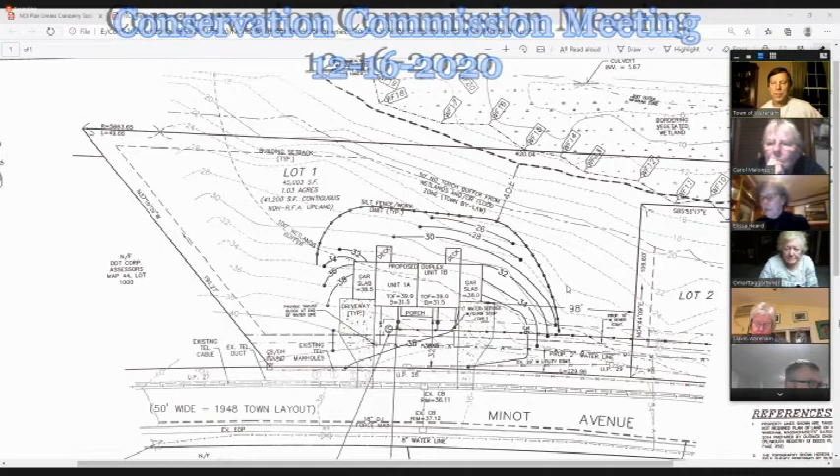It's not good. The engineer is on the meeting. That's good. Do you want to do both of them together, or you want to keep them separate, David? Separate, please. Okay. So this is the 80 to 82, correct? Yes. Okay. Chris, I gather you're here for this hearing? Oh, it's actually Jim. That's right. Yes, Jim. I'm with Outback Engineering. So Jim, what's your last name? Pavlik.

Thank you. So Mr. Pichette will read to the hearing. Sorry. I need my cup of tea. Thank you. Maybe they had shrimp on the barbie for Outback.

Okay, this project site is at 80 to 82 Minot Ave, and this project involves the construction of a duplex in the buffer zone to bordering vegetated wetland. A 28 by 82 foot duplex building which includes garages on either side of the duplex is proposed, and this would be approximately 75 feet from the edge of the wetland. This is a project that was permitted previously, but the order of conditions ran out, and the applicant is now reapplying to get a valid order of conditions in place for the project. The structures are proposed to tie into town sewer and water. The site slopes from the road to the back of the lot.

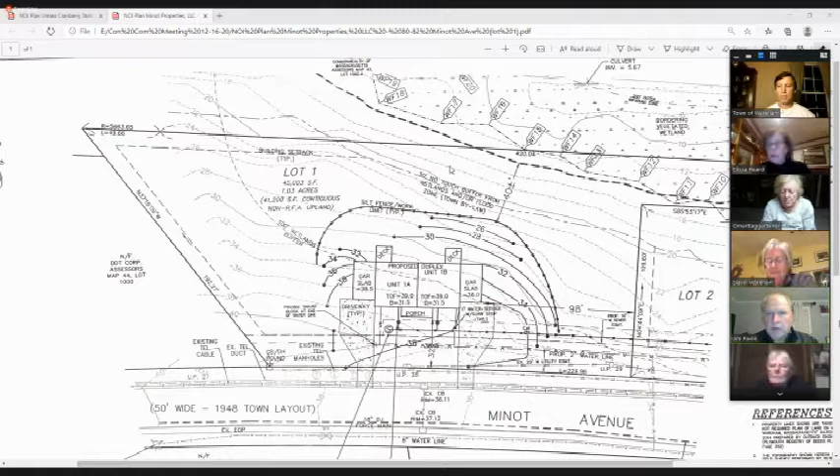I can address that. If that's something the commission would love to see, we could place some boulders along the back limit of work line. Right. I think it's important because it so often expands over time. You have kids, you've got a good plaything, and if it's that close to the wetland, then I think we have to be really careful. It's already too close in a lot of ways. Well, there's certainly plenty of boulders there, so I'm sure they wouldn't mind placing them in that location. Okay, great. No more questions now.

Thank you. Carol? No questions. Ron? Yeah, when was this project originally approved, Dave? It was originally approved a little over 3 years ago. So that would have been back in 2016, I believe. And what was the reason for the lapse in time? I'll have to have the engineer answer that. I'm not quite sure why they didn't proceed. So maybe you've got some information on that.

Yeah. Owner changed. So, full disclosure. Initially I was only the engineer on the project, and I later partnered up with a builder, and we purchased the lots. Unfortunately, I was getting divorced. So we had started the work and then had to put things on hold. And my divorce was just finalized within the last couple of months. Oof, that was a long one. It was over 2 years, almost 3.

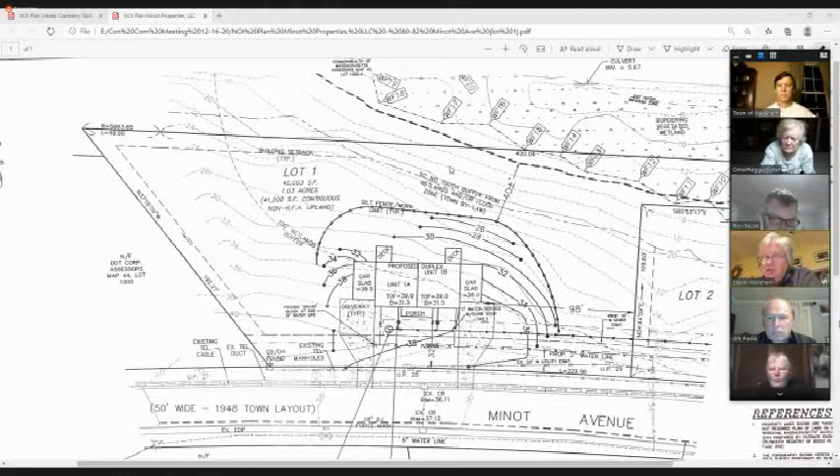Kwame, any questions? I'm just trying to get my bearings correct. I've seen the site, the clearing. Where are the train tracks? They're on the other side of this property. They run parallel to Minot Ave until you see them crossing Minot Ave up there. Oh, okay. Are they on this map?

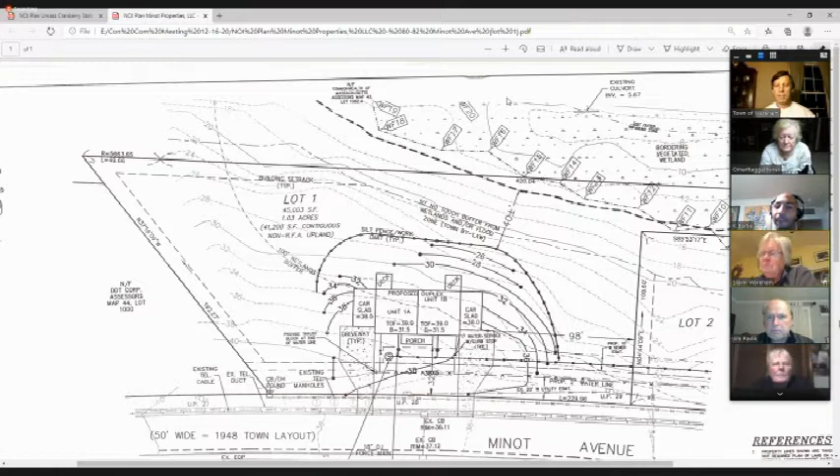I think not, the tracks themselves are not on the map, but this back property line is basically the start of the Commonwealth of Massachusetts right-of-way for the railroad. Okay. The trains go over the wetlands. Yes, in fact, that's what I thought. On this plan, the train track is basically right here, or just past where the cursor is. Okay, understood. Thank you. Michael, any questions? I think I'm good for this one. Thank you. I have nothing.

Is there anybody on the line that'd like to speak for or against this project? Can I ask a question? Yes. Can I ask the builder, how big are those decks that you have out back? How big are they? 12 by 12, approximately.

I mean, would we have any problem with them making it 12 by 15 or something bigger at this point? Because otherwise, 12 by 12 on a deck is pretty small. I don't think we have much to say in that. It's well within, well, not within, yeah. I was sort of thinking that it would benefit them to have that a little bigger now, and then they wouldn't be as apt to want to expand closer to it.

Jim, are these modular construction? We're still evaluating that, but the decks would likely be stick built on site anyhow. And if the commission is amenable to the idea to allow or put a condition in that the decks shall be no larger than, maybe I can suggest something like 12 by 16 or something like that.

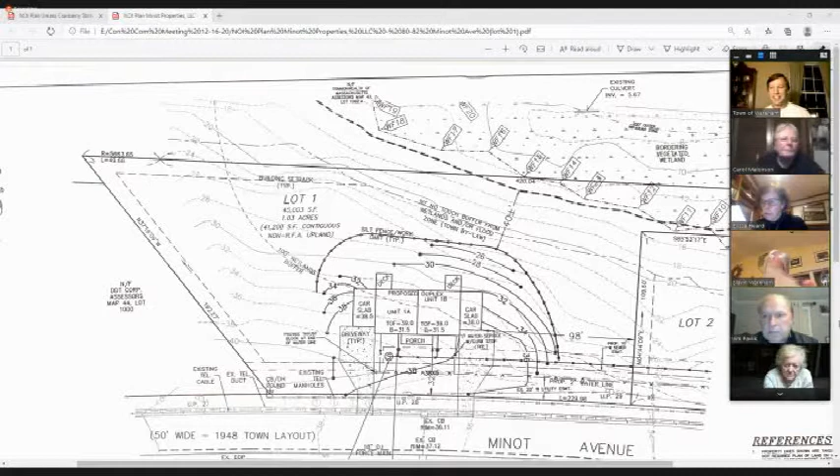And Jim, before you start anything, see Mr. Pichette for the documentation. Certainly. Appreciate it. Thank you. Excuse me, Molly, you're on my paper. Dave, can I go out of order and continue with the Minot part, or would you rather go back to University of Massachusetts? I'll let Sandy determine that one. Go to the next Minot property since we already have Jim on the line.

All right, notice of public hearing pursuant to the provisions of the Massachusetts Wetland Protection Act, General Laws, Chapter 131, Section 40, and the Wareham Wetland Protection Bylaw, Division 6. A public hearing will be held on Wednesday, December 16th, 2020 at 6:30 p.m. on the notice of intent for Minot Properties LLC, care of Outback Engineering, Inc., 165 East Grove Street, Middleborough, Mass. 02346, to construct a duplex located on Assessors Map 43, Lot 2, 90 to 92 Minot Avenue, Wareham, Massachusetts.

Thank you. Who's here to speak for this project? Identify yourself. Again, this is Jim Pavlik from Outback Engineering on behalf of Minot Properties LLC. Thank you. Mr. Pichette, your turn.

Okay, so this lot is the next lot over, heading towards Onset on the same side of the road, 90 to 92 Minot Ave. This project involves the construction of a duplex in the buffer zone to bordering vegetated wetland. Again, a 28 by 82 foot duplex building, which also has garages on either side, is proposed, approximately 80 feet from the edge of the wetland. This project had been permitted previously, but the order of conditions ran out, so it's the same situation where they're trying to reestablish a valid order of conditions. Again, this project would tie into town sewer and water.

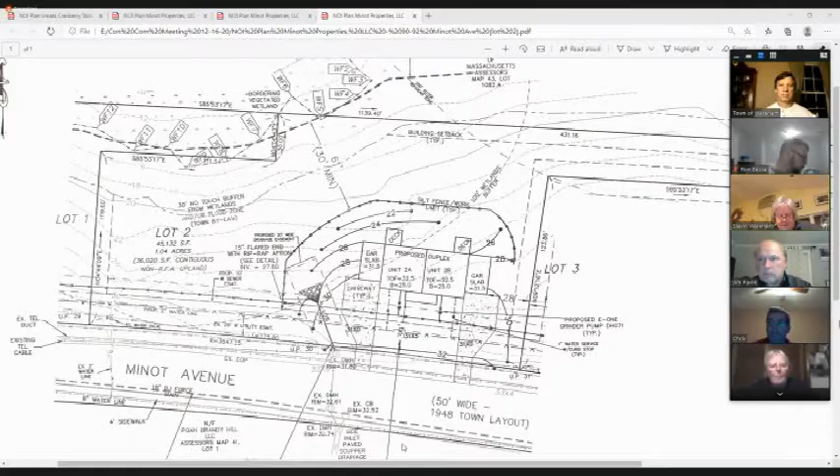We have a notice of public hearing pursuant to the provisions of the Massachusetts Wetland Protection Act, General Laws, Chapter 131, Section 40, and the Wareham Wetland Protection Bylaw, Division 6. A public hearing will be held on Wednesday, December 16th, 2020, at 6:30 p.m. on the notice of intent for University of Massachusetts Cranberry Station, care of Nitsch Engineering, 2 Center Plaza, Suite 430, Boston, Massachusetts, 02108, to construct an addition to an existing lab building and ADA parking to access the proposed addition, located on Assessor's Map 129, Lot S1, 1 State Bog Road, Wareham, Mass.

Thank you. Who's here to speak to this project? Please identify. Hi, good evening, Madam Chair. My name's Stephen Ventresca with Nitsch Engineering. Also with me is Brittany Veek from Nitsch Engineering. And we also have the project manager for UMass Amherst, Carolyn Bullens, and the director of the Cranberry Station, Hillary Sandler, on the line as well.

So first, I just wanted to... Wait, Stephen, can you wait one second? Absolutely. Mr. Pichette speaks to the project, and then you can have your turn. Okay, thank you. Dave.

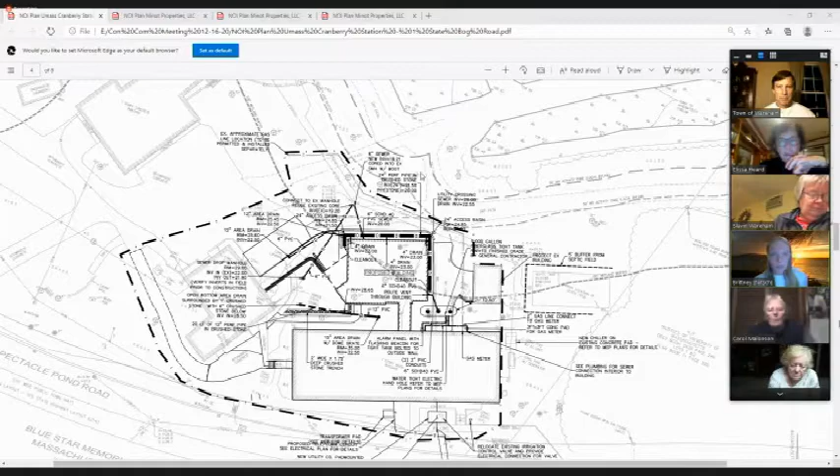Hi, I'm Brittany Veek from Nitsch. How do you normally do this? Am I allowed to share my screen? I have a colored plan I can show, or I can go off the plans on your screen as well. That's fine. No, I can turn this off and let you share. Hold on one second. Okay. Oh, it says it's disabled by the host. Okay, you should be good. Yes. Okay.

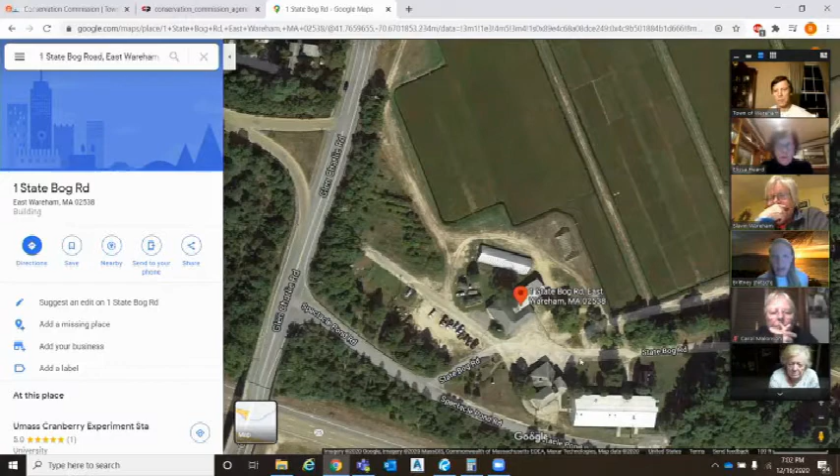So just for some context, a Google Maps view, State Bog Road is right here. It's a combination of paved asphalt up until here, and then it becomes a dirt path. This building here is the existing lab building, and we're proposing an addition onto the back of it here. And then there are cranberry bogs back here. And I think the ditch area that we're closest to is in this area here. So let me go to my plans.

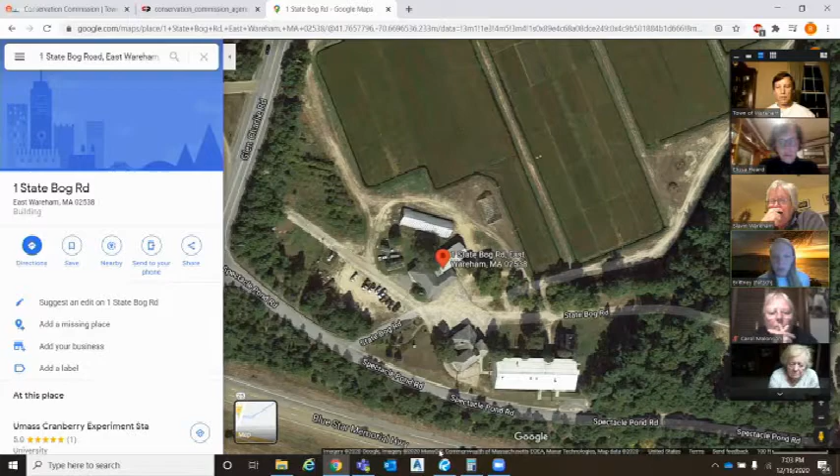This kind of shows you the existing surface cover. Over here we have paved asphalt. This is a vehicular area in the existing condition. We have a dirt path along here, and then a concrete area over here and landscaping. In the proposed condition, we're going to be adding a building addition onto the grass area, and we're going to be adding pedestrian impervious area. The vehicular impervious area will remain as is. We will be redoing it to make it compliant with ADA regulations for access to the building, but we won't be adding any impervious area for the cars.

The dirt road really is proposed to remain, and it will be expanded a little bit in a previously grassed area. The erosion control area is shown here in this purple color, and it's proposed along the limit of work, which is within that 50-foot buffer. We do anticipate that there will be construction vehicles that use this dirt path to access the area over here, and that area is shown here where we anticipate that they will be within the 50-foot buffer. This is not on the plans that we submitted, but we would like to propose putting erosion control downstream of that area too, just to make sure that we're not causing any sediment to get into the wetlands.

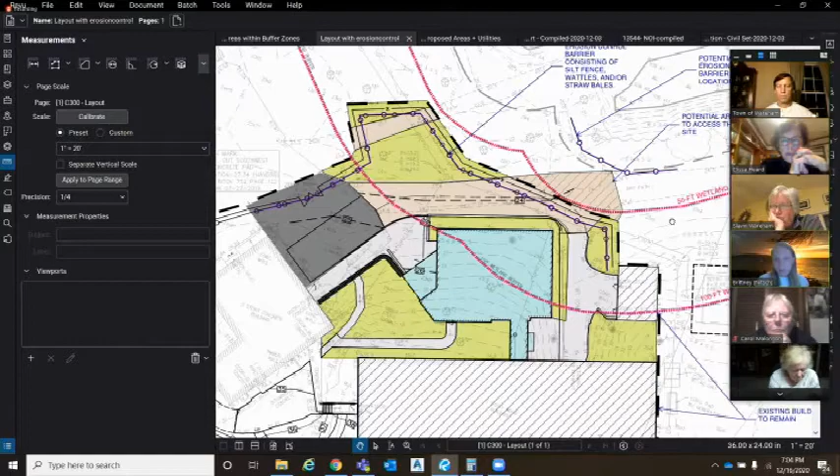Let's continue on. So for utility improvements, we are proposing a tight tank for lab waste. That tank will be outside of the 100-foot buffer. There is an existing septic field for the building, and that's proposed to remain. No proposed improvements on that. We're not increasing sewer flows from the building, and we did a Title V inspection on that, and it was found to be adequate.

So we have a few stormwater improvements that will be used to mitigate stormwater runoff from the site. We have two stone and perforated pipe systems. Here the roof runoff will be directed to a stone trench with a 24-inch perforated pipe, and stormwater will infiltrate. We found sandy soils on site with a pretty good infiltration rate, and any overflow will come from a roof drain and will spill out at grade. That is only expected to happen in the 25-year storm and above.

And then we have a pipe and stone that will infiltrate stormwater runoff from the grass area back here, and a stone trench to infiltrate runoff from this walkway here. In addition to the roof going to this pipe, we're also going to collect stormwater runoff from this concrete walkway and direct it into that infiltration trench. There's an existing building here that will remain, and the existing building here will also remain. Again, we'll also have a sanitary sewer connection for the building that will go into this existing manhole. This is just rerouting an existing pipe that goes into the manhole here.

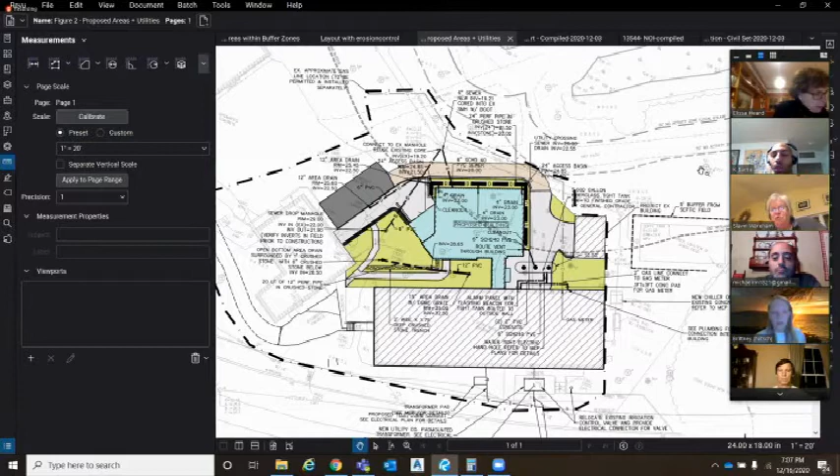I do. The area that you're going to have this construction on is sloped, is it not? Yes, it is. How much material do you have to dig away in order to put this building on? I do not have that number. We can figure that out, but I don't know that quantity offhand. But you're going to have to make it even? Level it out? Yes, so I'm not sure exactly what the elevations are. I don't have it on this plan, but yes, I think the building will have to go into the slope.

Okay, so my concern is that material has to be removed to level the work area. I just want to make sure it's not left on the site? No, any materials will be disposed of as required. Okay, off-site. Dave, I don't want piles of dirt hanging around. Yeah, we don't have a contractor on board yet, but what we're imagining is a safe stockpile area in this paved area over here, and any stockpiles would need to have erosion control barriers around them. That's just a temporary measure. Any excess material would eventually be removed from site.

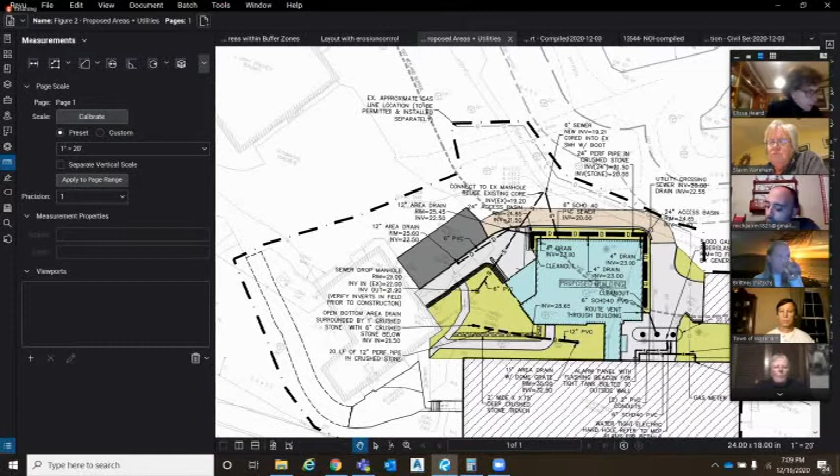And I'm sorry, Madam Chair, if I may add, any materials that we can't reuse on site as part of the addition construction will be taken off site and disposed of off site. There will not be any stockpiles remaining on site. Brittany, can I see the previous plan you had up? I think it did have some elevations on it. Oh, yes. We're going from about elevation 24 to 34 up here. Okay. And you'll be leveling it off. Yes, where the building is. There will still be a slope in this area here.

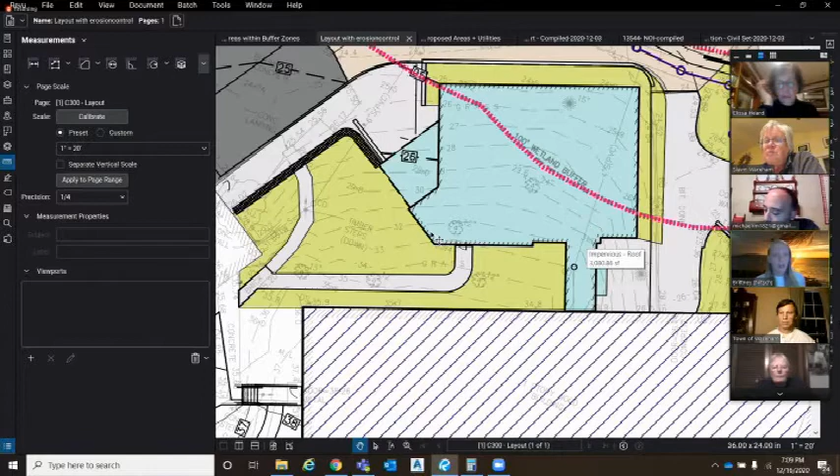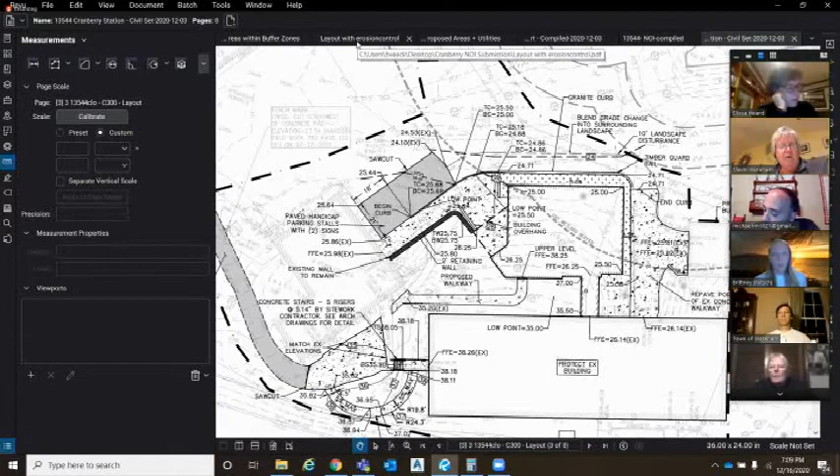I have a grading plan I can pull up. That's fine. I just wanted to make sure we were not leaving a lot of material, and whatever you don't use, you will be removing. Yep, with correct disposal. Okay, that answers my question. Is there anybody online that has any questions for or against this project? I'm not hearing anything. I'll take a motion to close the hearing.

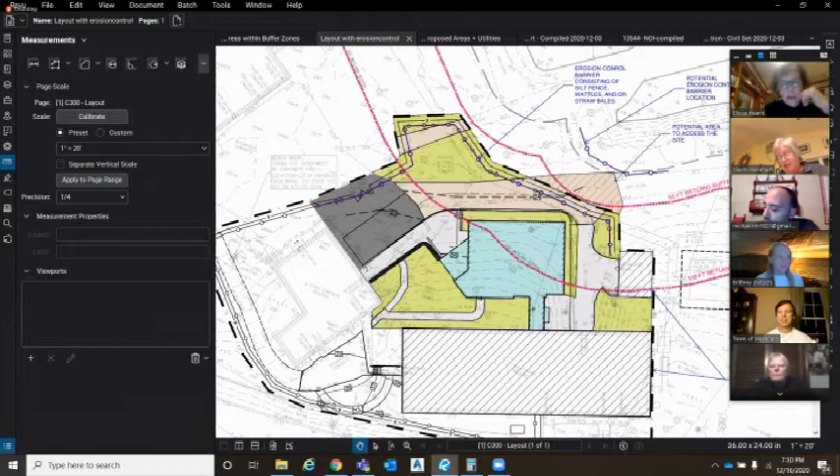So moved. A motion to continue, Sandy. Oh, yeah, we don't have a DEP number. I withdraw my motion. I'll take a motion to continue until January 6th, 2021. So moved. Second. Okay, roll call. Elissa? Yes. Carol? Yes. Ron? Yes. Mary? Yes. Sandy? Yes. So we're continued on this until January 6th pending the DEP filing. I don't know if all four of you need to come back for that one, but you're welcome.

We might come back just for the witty banter. We enjoyed listening in. Thank you. Thank you and be at peace and happy holidays, everybody. Thanks, same to you. Happy holidays. Thank you very much. Okay.

We then go to continued public hearings. We have Kevin Nickerson. I believe a new plan was sent out late this afternoon. Is there anybody here for that project? Good evening, Brad Bertola with JC Engineering. Hi, Brad. All right, let me just get that plan up here. Hold on one second. Now, this was supposed to come before zoning and they continued it until, I thought, tonight. But I couldn't find any agenda online for a zoning meeting. Any idea, Brad, when they're going to continue that? It was continued to the next hearing, which I believe is in January.

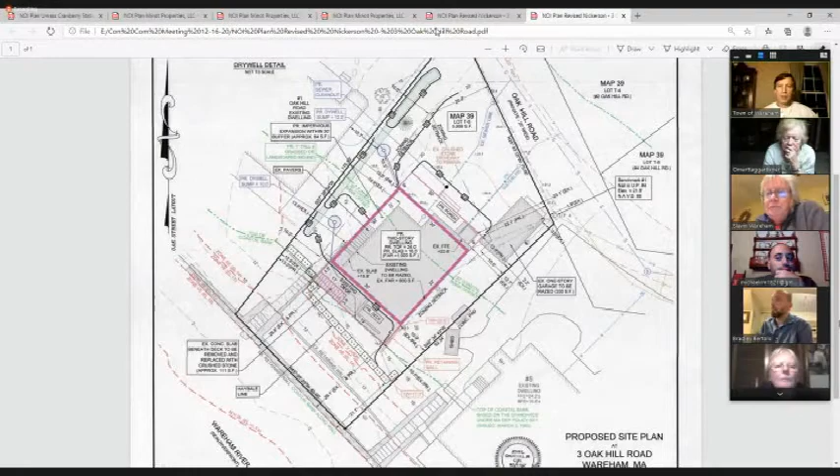Sorry, excuse me. Alan, your phone. Sorry. All right, let me just get that other plan. Hold on one second. I'm not answering it. Not Sandy's secretary service tonight? No. He was supposed to turn it off or take it with him.

I have some pictures of that area if you allow me to screen share after you show the old plan. Yeah, I was just surprised to find the plans differ in that area. Before, I never showed the existing pavers; it just didn't cross my mind that this would be an issue. So I wanted to make sure I showed what was really in this area where I'm expanding, where most of it is previously altered. There is some grass and maybe one little shrub on the side.

See what I mean? It's so much shorter. So that just showed the slab underneath the steps. And so you're saying that because the area Dave is circling now is pavers, you consider that altered. So we have reduced to a little square within the 30-foot no work zone that isn't covered by concrete or pavers already. I did, but in my calculations I considered that as pervious. I know it's most likely like a concrete slab and most of that water runs off, but I was doing a pre and post between existing impervious areas versus proposed. So in that area I considered it pervious, to not overinflate my numbers, and right now there's a decrease of roughly 50 square feet of impervious area.

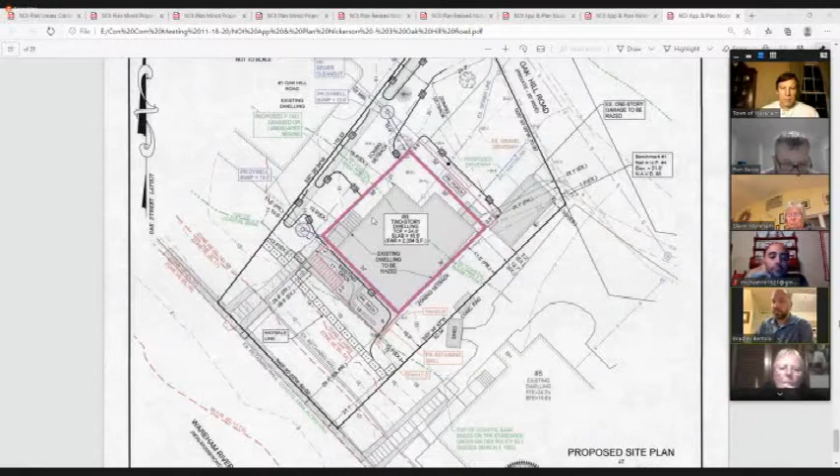Okay, so Dave, can you put back the current plan? And while he's doing it, Brad, last time there was 80 square feet within the 30-foot no work zone. What is it now when you include the pavers? It must have reduced that number. I think he said 64. There's 64 square feet of new impervious area. That's the final number. So I now have 64 square feet within the 30-foot no work zone? Yeah, an increase of 64 square feet, but we're decreasing the impervious area by removing the concrete pad underneath the existing deck. I have pictures that I could show if you want. So I now have 16 square feet within the 30-foot no work zone.

No, 64. No, 64, and it can't be. That little corner can't be 64 square feet. Yeah, it is. It's 16 by, what'd you say, 4 feet by 16 feet, right? Yes, that's 64 feet. Okay, and that's within the 30-foot buffer. Again, yep. There is an expansion outside the 30-foot, and I did not include that. That's not what I'm concerned about. I'm concerned about the land that was within the 30-foot no work zone.

Yep. Now, if we don't approve this project as presented, what do you think the homeowners will do in order to not impact the 30-foot no work zone? I mean, you reduce the size of the house from 3236 to 3230. I guess the only other option is to rebuild on the same footprint. That's 26 feet wide. I don't see any detriment with it being 30 feet wide.

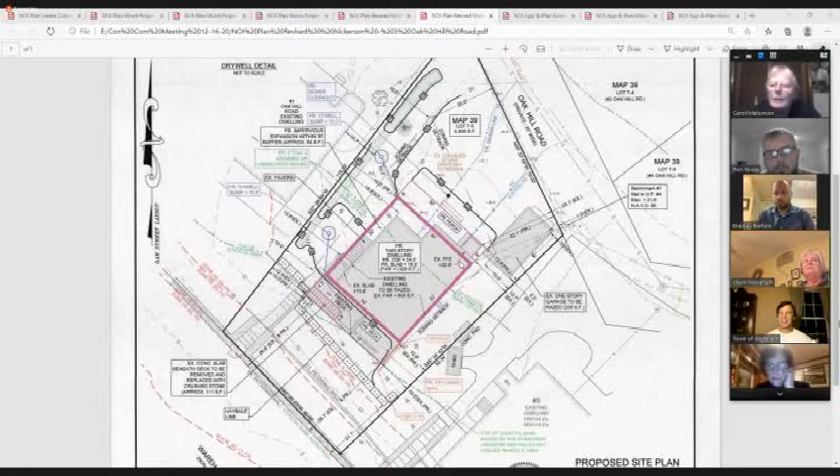So is there anybody here that wants to speak for or against this project? If not, I make a recommendation that we continue until January 6th. Second. Hold on, you got some people that want to speak. Can you hear me? Please identify yourself. I'm Jack Nolan, here with Susan Nolan beside me. I just want to confirm what Brad said earlier.

I did review the engineering. We're downhill from the proposed site, and our concern was whether they were going to do anything that would increase the amount of water that comes onto our property from theirs. I reviewed it with Brad, and as Brad said, with what they were doing, we were going to get less runoff, and I was happy with that.

And we had no other problems with the proposed slightly larger building, or with it going to 2 floors. So we had essentially no problems; with the proposed engineering they took care of the only concern we had. Thank you. Anybody else?

What does the commission want to do? I make a motion to continue the hearing until January 6th? Until the next meeting, yes, January 6th. Second. Thank you. Brad, would that be sufficient time to give us a new plan? Yes. Okay, we have a motion to continue until 1/6.

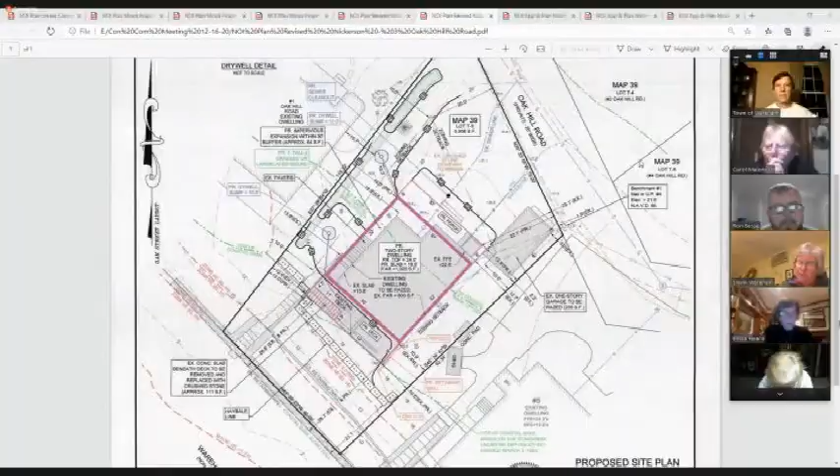We have the next two, Borrego. I understand they've asked for a continuation. Is this also until the 6th? Yes. Okay. I'll take a motion to continue both hearings until the 6th, but before I do that, is there anybody who wants to speak to that project before we continue? Hearing none? Motion to continue both solar projects to 1/6.

Second. And I have a motion and a second. All in favor. Elissa, yes. Carol, yes. Ron, yes. Mary, yes. Sandy. Yes, it's continued. The next thing up is the certification of compliance, Dave.

Yes, this was a project that involved the construction of an addition at a house. This is a very old order that just never got cleaned up from years ago. The project is finished, so I would recommend the issuance of the certificate of compliance for this project, which is at 22 Fairfield Drive. So moved.

Now, we have some documents to sign. Town Hall is closed tomorrow because of the weather, and Town Hall is closed unless we have an appointment, say, for next Monday. Dave, how do you want to handle signatures? Well, I think we can just basically do it the way we've been doing it.